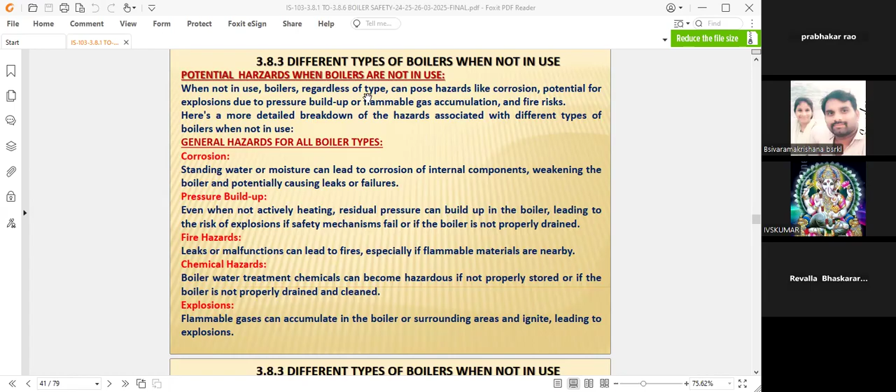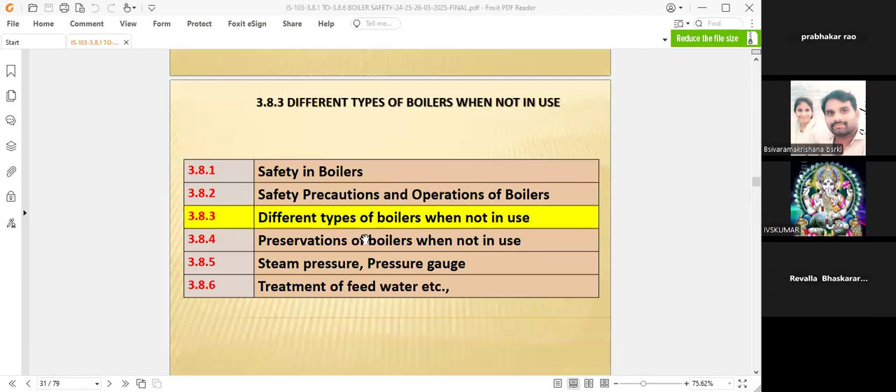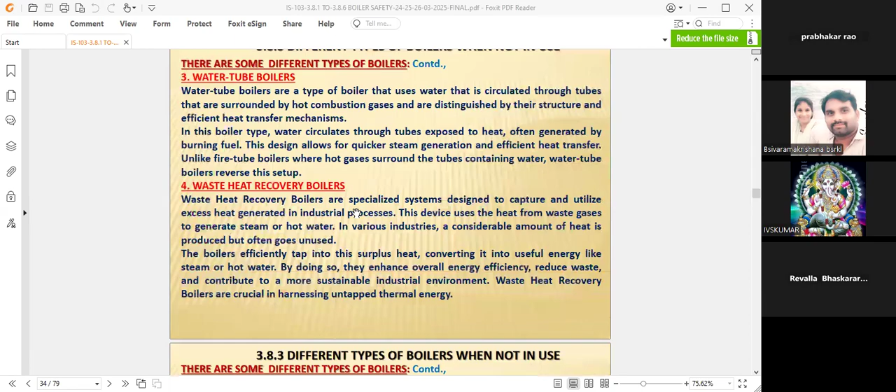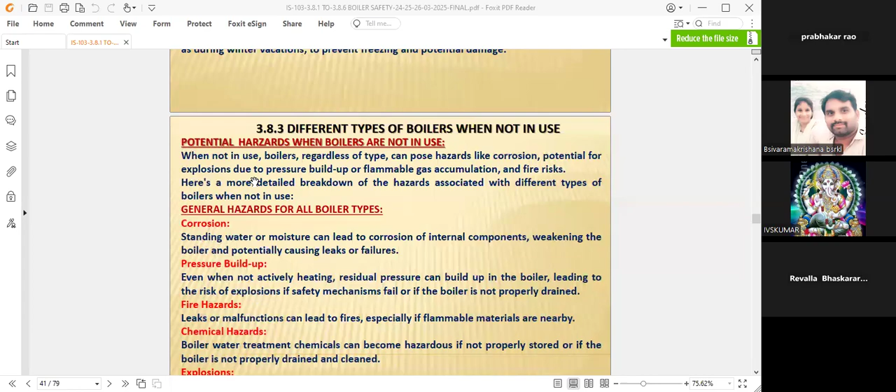Yesterday, we discussed the safety of different types of boilers. In that, we'll be discussing several things with different types of boilers. With respect to different types of boilers, what are the potential hazards? What are the potential hazards when the boilers are not in use? Then we will go to the safety precautions after the potential hazards associated with when the boilers are not in use.

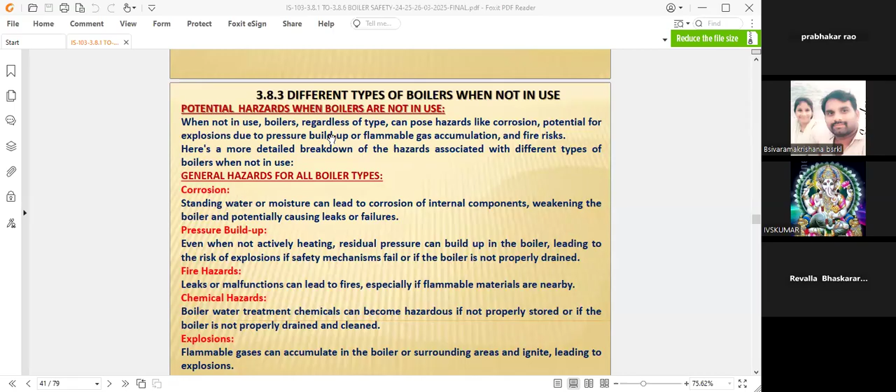When they are not in use, boilers, regardless of type, whatever type it may be, can pose hazards like corrosion, potential for explosions due to pressure buildup or flammable gas accumulation, and fire risks. Because of being not in use, they can have hazards like corrosion, because of standstill water, and potential for explosion due to pressure buildup inside the tubes because of accumulation of water. Flammable gas accumulation is also there, and fire risk may also be possible.

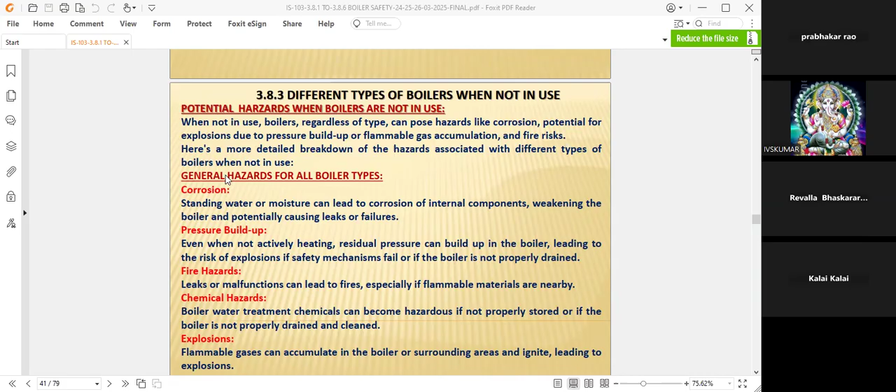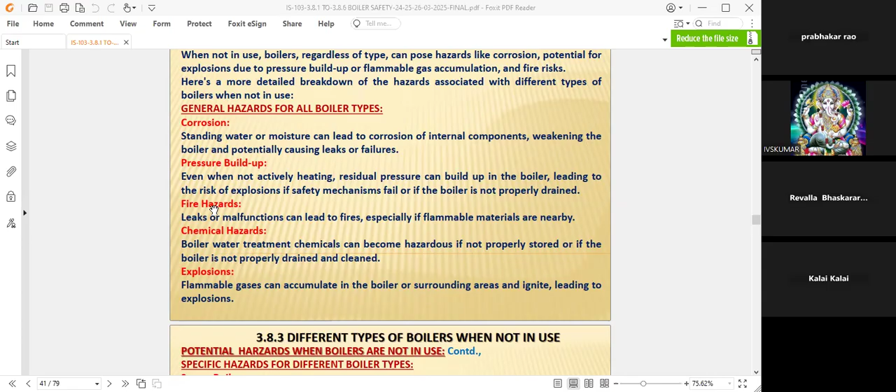Therefore, here is a more detailed breakdown of hazards associated with different types of boilers when not in use. One hazard is corrosion. Once corrosion has taken place, definitely pitting and leakage of the boiler will happen during running. It will explode. Pressure buildup is one of the hazards. Fire hazard is another hazard. The chemical hazard and the explosions.

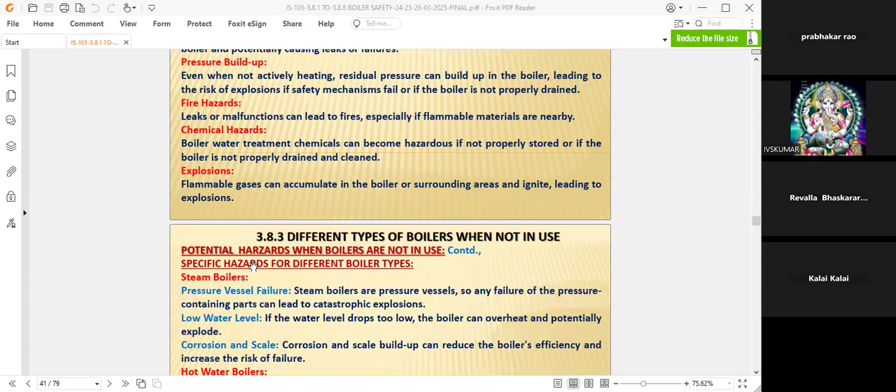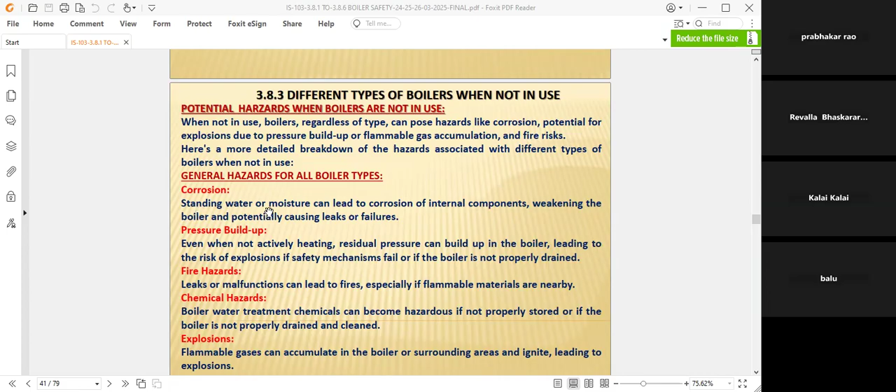Apart from this, there are specific hazards with respect to steam boilers, hot water boilers, condensing boilers, oil-fired boilers, and gas-fired boilers. There are specific hazards for these types of boilers also. But in general, for all types of boilers, corrosion is one of the hazards. Standing water or moisture can lead to corrosion of the internal components, weakening the boiler and potentially causing leaks or failures because of the corrosion.

Pressure buildup is also there. Even when not actively heating, residual pressure can build up in the boiler, leading to risk of explosions if safety mechanisms fail or the boiler is not properly drained. Because before taking it into preservation, we have to first drain the accumulated water after the shutdown has taken place. Then after fully draining all the tubes, only then fill it up with feed water, and then close it once the pressure reaches. At that time, the pressure buildup is also there because of stagnated water.

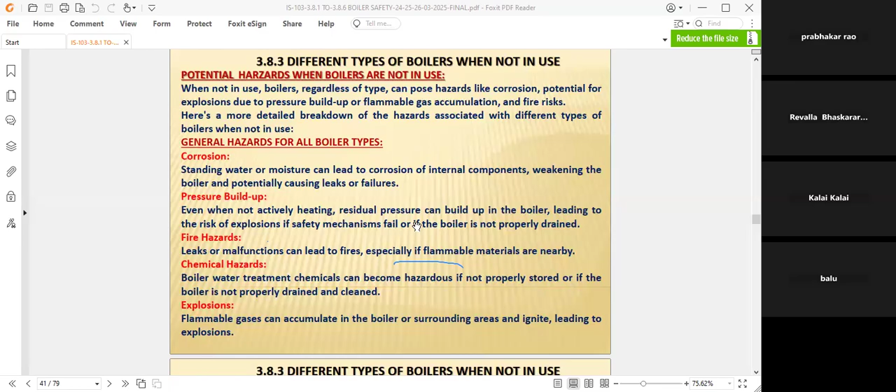Even when not actively heating, residual pressure can build up in the boiler, leading to risk of explosions if safety mechanisms fail or the boiler is not properly drained, because it depends upon being properly drained before being taken into preservation.

A fire hazard is also one of the hazards. Leaks or malfunctions can lead to fires, especially if flammable materials are nearby. Because once they preserve the boiler with all precautions, suppose in case anybody, unknowingly or knowingly, keeps flammable substances beside this boiler, it will lead to a fire hazard also. If the boiler leaks, or the flammable materials catch fire, then it will lead to the boiler also, and vice versa.

Chemical hazard is also one of the general hazards in the preservation of the boiler. Boiler water treatment chemicals can become hazardous if not properly stored, or if the boiler is not properly drained and cleaned, because it all depends upon how properly it is drained and washed with water before filling up again with feed water after the shutdown has taken place, before the preservation of the boiler.

So explosion is one of the important hazards. Flammable gases can accumulate in the boiler or surrounding areas and ignite, leading to explosions. We should not give any chance to explosion, by keeping visual inspection during the preservation of the boiler when not in use.

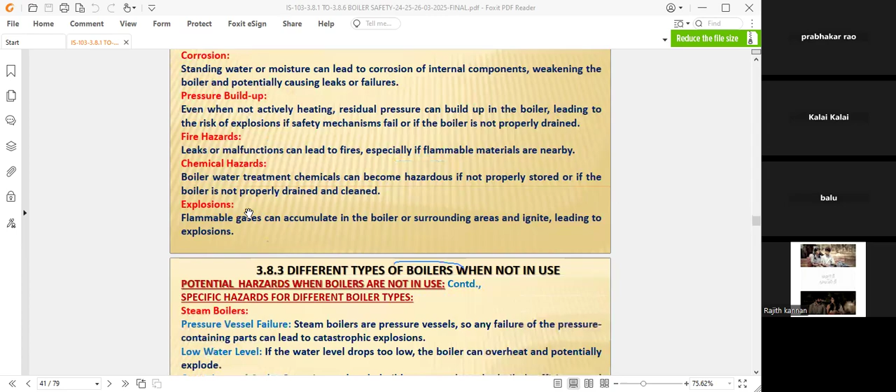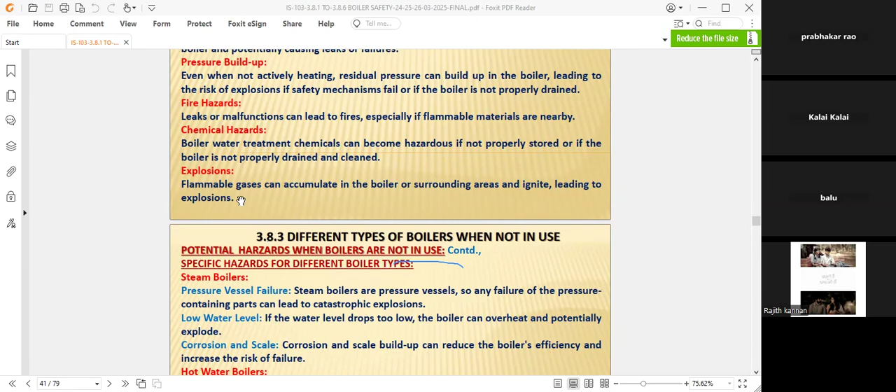Therefore, one boiler attendant and one helper are always there with the boiler, watching all the steam and pressure gauges. Though it is not heating, it is functioning, so we have to take care of the pressure gauges and temperature gauges, and the existing pressure you are keeping for the preservation. You have to see that it is definitely worthwhile by keeping supervision of this.

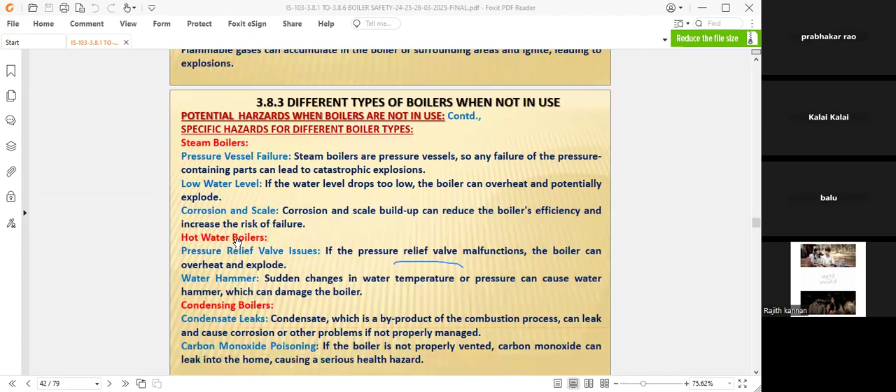Specific hazards with respect to individual boilers, apart from the general hazards, which I want to expose here. Steam boilers have some hazards. Hot water boilers have some specific hazards. Condensing boilers have some hazards, as well as oil-fired and gas-fired boilers.

For steam boilers, pressure vessel failure is a specific hazard. Another is low water level. High water level is also there, and corrosion and scale is also one of the specific hazards with respect to the steam boiler. Pressure vessel failure, because the steam boilers are pressure vessels.

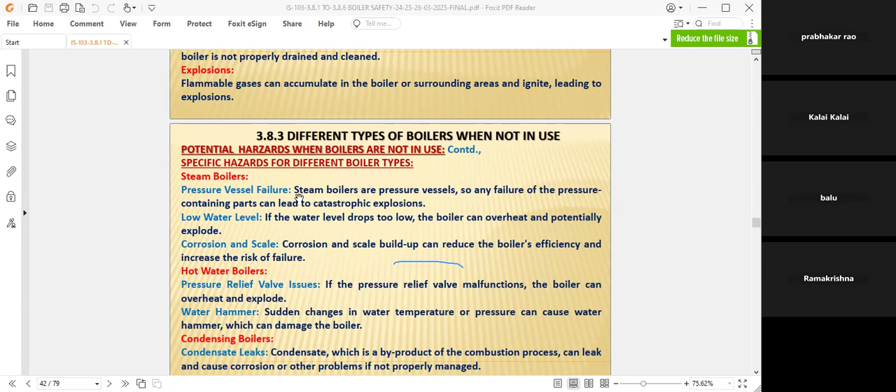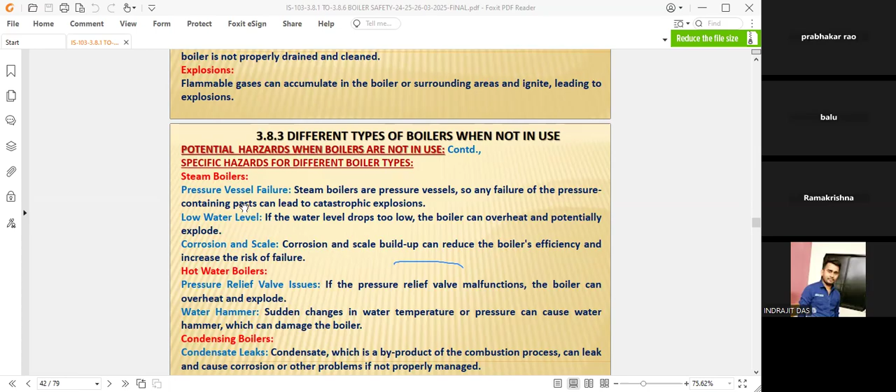So many failures of the pressure containing parts can lead to catastrophic, fatal explosions because of the steam pressure, temperature of the water, condensate pressure and temperature, flue gas pressure and temperature, blow down valves and blow down pressure, blow down water, and feed water pressure. Everything depends upon the pressure vessel's functioning.

For low water levels, if the water level drops too low, the boiler can overheat and potentially explode, because when it is running and low water is there, we have to increase the combustion of the fuel, but it is not in use now. At that time, water level is low. We have to see that water level doesn't drop too low, because the boiler can overheat.

We are not supposed to let the water level be too low or too high. It should be maintained in the steam drum as well as the mud drum. We have to keep 50% of both: 50% steam, 50% water, like this. 50% feed water going to the feed water of the boiler tubes.

This is very important. Corrosion and scale also depends on this. Inside the tubes, it depends upon the feed water only, but outside the tube, it depends upon how best you can keep the boiler preserved when it is not in use. The corrosion and scale buildup can reduce the boiler efficiency and increase the risk of failure. When efficiency comes down, the risk of failure increases because of the corrosion and scale formation.

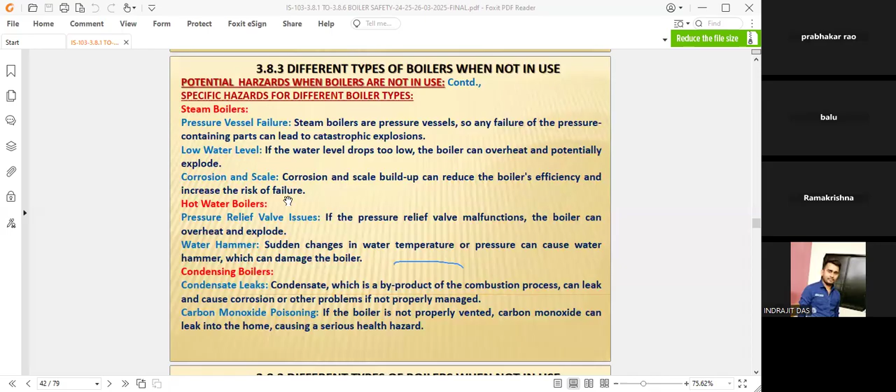Hot water boilers, since they are only for hot water generation, have issues with pressure relief valves and water hammer. We send the feed water, and by flue gas combustion and fuel consumption, flue gases are released. Due to the flue gas heat, the water inside the tube gets heated, and we get hot water.

During the process of getting hot water from feed water using the thermal condition of the flue gas, there may be valve leakages or clogs building up inside. Therefore, the pressure relief valve has to be taken care of. We have to immediately address the blow down, and any airlocks must be cleared immediately when the pressure relief valve is not working properly.

Therefore, pressure relief valve issues are more common in hot water boilers compared to steam boilers. If the pressure relief valves malfunction, the boiler can overheat or explode. If any malfunction is there, using the manual with the gauge glass, you have to check what level should be maintained and how much pressure should be maintained. This must be operated manually with the experience of the boiler attendant.

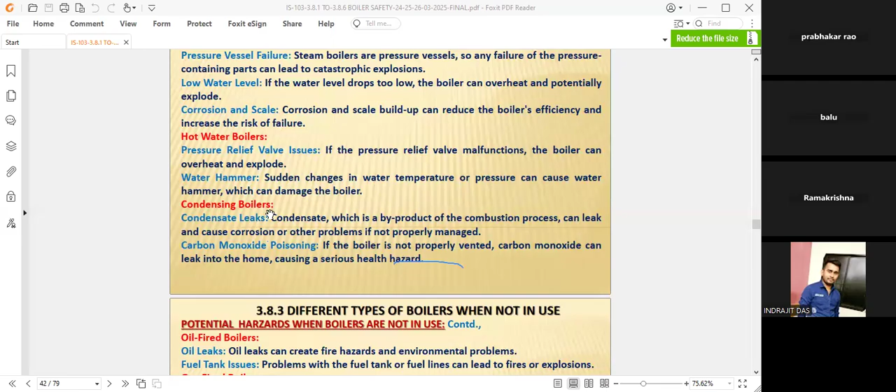Condensing boilers also produce condensate as vapors are consumed. The condensate leaks, and carbon monoxide is one of the poisonous gases involved. The condensate, a byproduct of the combustion process, can leak and cause corrosion or other problems if not properly managed, because along with the hot water or steam, the vapors need to be condensed.

The condensate reaches a temperature of about 90 degrees centigrade. You have to maintain both the temperature and pressure of the condensate. If the condensate, having that much temperature and pressure, develops leaks, the combustion will definitely be affected.

This creates an imbalance in flue gas generation, since combustion takes primary air, secondary air, and tertiary air through the FD fan. Combustion will differ, and the flue gas temperature and water temperature will all become imbalanced. That's why the condensate is one of the important areas to be managed carefully without any leakages.

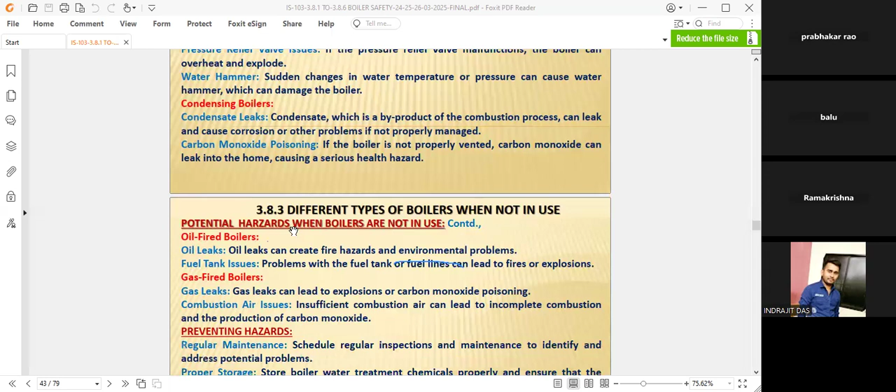For oil-fired boilers, oil leakage is there. Suppose fuel tank issues arise—oil leakage can create fire hazards and environmental problems. Fuel tank issues are also there; problems with the fuel tank or fuel lines can lead to fires or explosions.

The heating element should work properly through the pipes, because oil heating elements are very important to maintain the temperature of the oil, and the fuel tank also needs its temperature taken care of. Oil leaks create explosion and fire hazard problems. Fuel tank issues are also there—fuel tank meaning service tank, overhead tank, or the main tank.

Gas-fired boilers have gas leaks and combustion air issues, because gas leaks can lead to explosions or carbon monoxide poisoning. This happens when ducting is not properly closed, or manholes or furnace openings are not properly closed, so outside air or inside flue gases escape.

Due to the ID fan and FD fan, flue gas goes outside while outside air is injected inside, causing a lot of differences in the flue gases. Therefore, gas leaks should be avoided when supervising the preservation of the boilers and related systems.

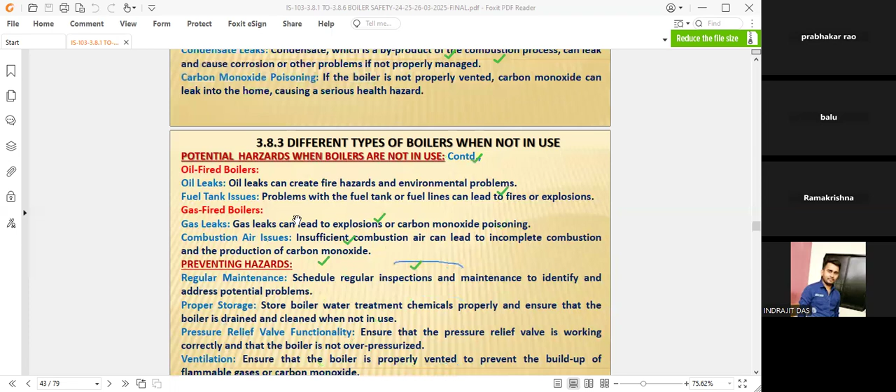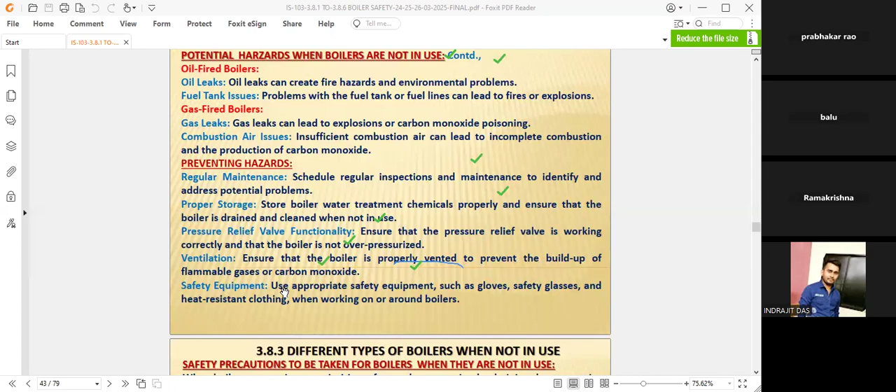Preventing hazards is also important. All hazards can be prevented by taking care of regular maintenance, proper storage, ensuring pressure relief valves function properly, proper ventilation, and proper safety equipment. By taking these five steps, potential hazards can be saved or minimized, mitigating the consequences that can happen.

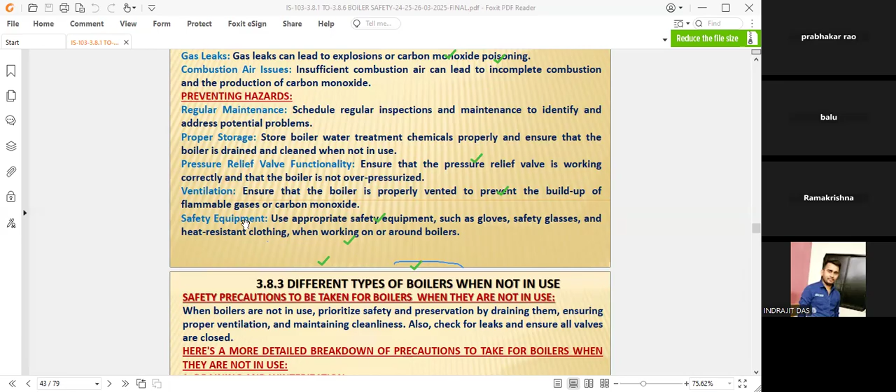I think who is the gentleman putting this green mark here, sir? Please kindly control this, sir. I'm requesting whoever is doing this by mistake, please don't mark like this. The other participants are getting confused about why this tick mark is being done. Please don't tick mark like blue and green, please.

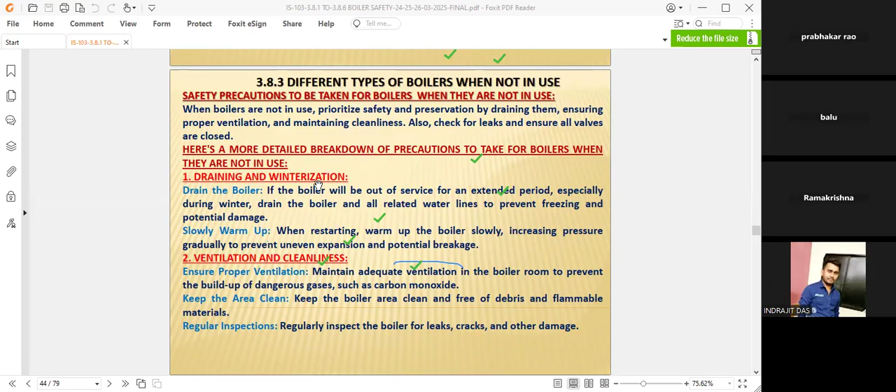So after potential hazards, we have to take care of safety precautions. Draining and winterization is important. Ventilation and cleanliness. And the third one is shutting down, restarting, and maintenance is important.

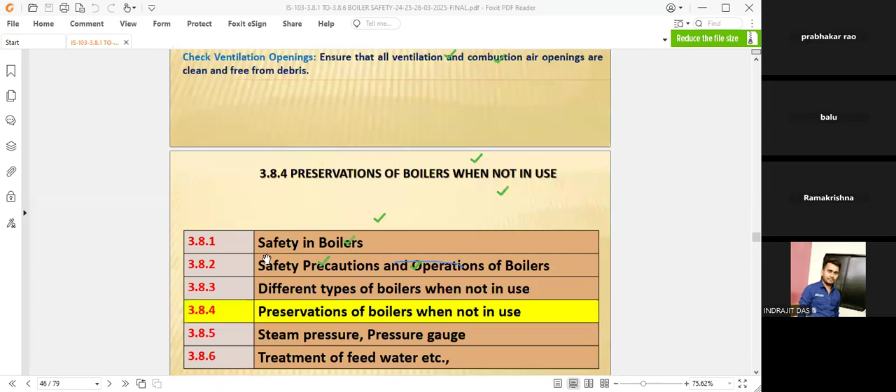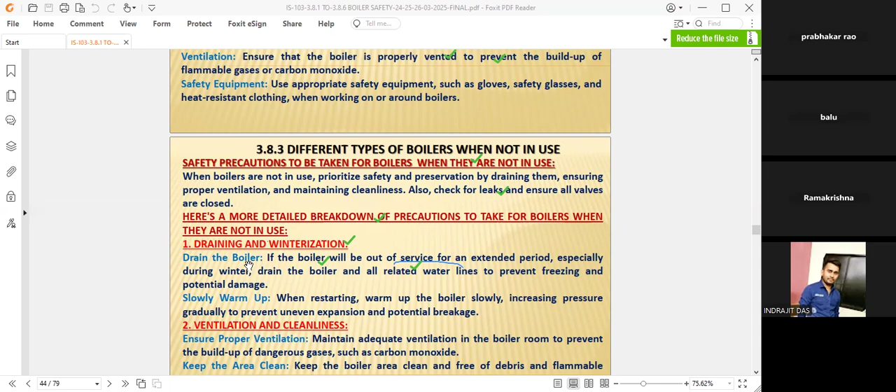When compared to different types of boilers, these things must be taken care of: draining and winterization, because draining the boiler is very important, and slowly warming is also very important. The boiler may be out of service for an extended period, especially during winter, so drain the boiler and all related water lines to prevent freezing and potential damage, since all the tubes are empty after draining.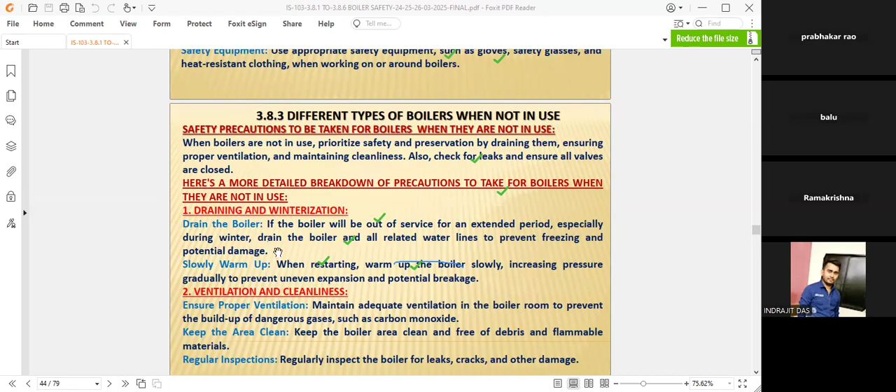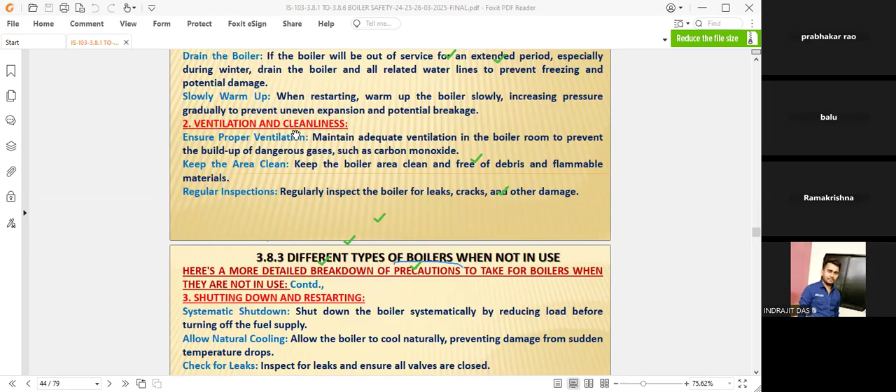It should be ensured that there is no water accumulation in any of the furnace tubes, boiler tubes, or economizer tubes. While running, it should be slowly warmed up, not suddenly heated, because as already discussed, tube failures will occur due to differences in water temperature.

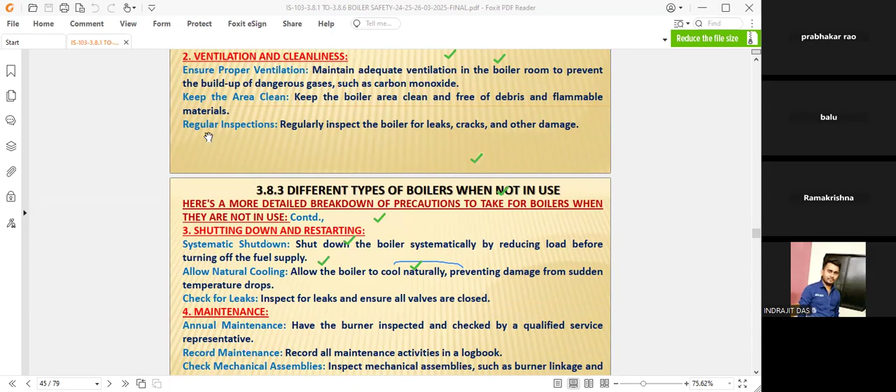Ventilation and cleanliness are also important. Ensure proper ventilation, keep the area clean, and conduct regular inspections.

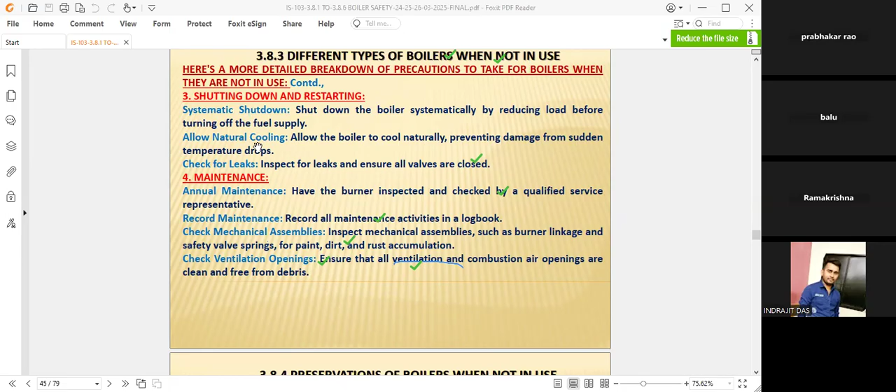Shutting down and restarting is important: systematic shutdown following a sequential manner, allow natural cooling, and check for leakage. After shutdown, give some time for natural cooling, then try to start once maintenance is over, checking for leakage before starting as well.

Maintenance also includes annual maintenance, record maintenance, checking mechanical assemblies, and checking ventilation openings. A very important word here is predictive maintenance.

That means where preventive action is not present in the systems, a risk-based approach is needed for all boilers. That's why we have to carry out risk assessment, and predictive maintenance will also be planned.

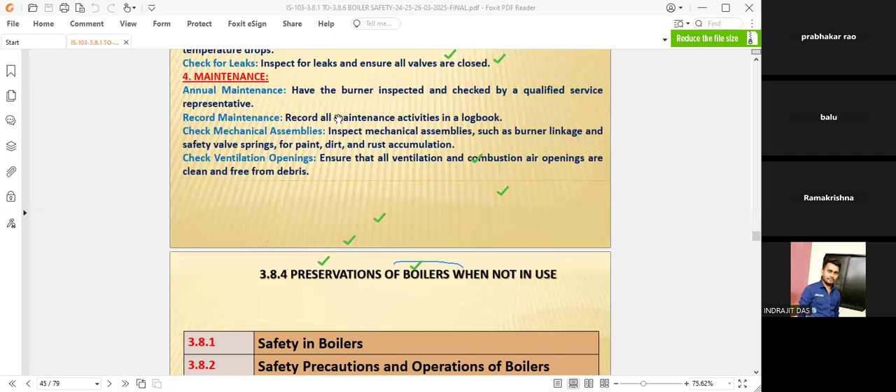Because the preventive maintenance we are planning, breakdown maintenance is sudden and unplanned, shutdown is planned, but in between we have predictive maintenance. That means whenever the occasion or opportunity comes, when the boiler pressure is getting down because steam is not required in other sections or by the turbine, at that time we slow down the steam pressure as well as the boiler pressure and the fuel feeding to the furnace or boiler. At that time, we have to take up preventive maintenance where the possibility is there.

And the last one is preservation of the boilers, which is very important.

The preservation of the boilers, please don't tick mark, sir. I request all the participants, anyone who is doing this green tick mark, please don't do this, sir. Kindly requesting. Please kindly wipe it out if anybody has done it unfortunately or unknowingly. Please. Thank you very much, sir.

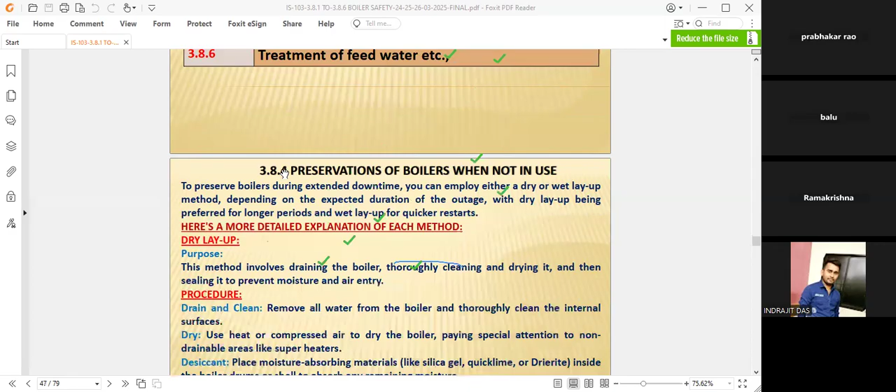The preservation of the boilers when not in use is very important. This is the third step. Preserve the boilers during extended downtime. That means we keep it at zero pressure, we are not extracting the steam or hot water, but extended downtime will be there. You can employ either a dry or wet layup method. There are two methods, dry layup and wet layup, depending upon the expected duration of the outage, with dry layup being preferred for longer periods and wet layup for quicker restarts.

See very clearly, dry layup is used when a long extended time is taken for the boiler, days together or hours together. But if you want to start immediately, go for the wet layup procedure. If a long downtime is there, go to the dry layup procedure. What is dry layup and what is wet layup we'll also be discussing. The purpose of this method, dry layup, with longer extended downtime, is the preservation of the boiler.

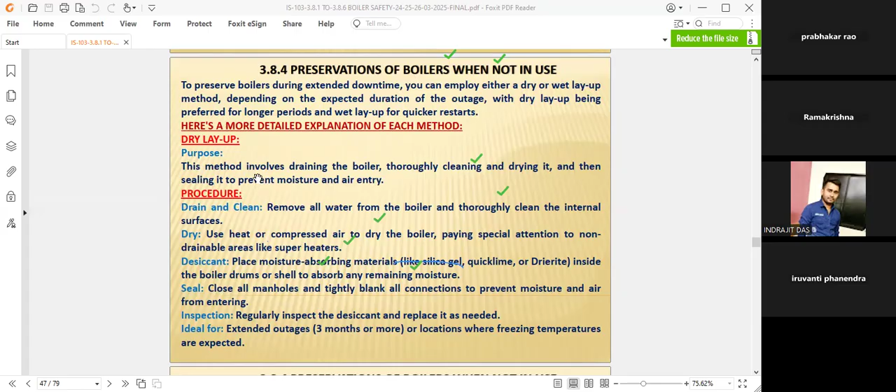This method involves draining the boiler thoroughly, cleaning and drying it, and then sealing it to prevent moisture and air entry. Because once a long time is there, after stopping the firing and slowly cooling down, drain all the accumulated water through all the sections like furnace, boilers, economizers, and clean thoroughly. Cleaning means normal water will be sent to clean any accumulations on the inside surface of the tubes. After the cleaning, drying it, natural drying is also taken care of.

Then if you ensure that there is no moisture inside or outside the tube, you have to take care of sealing it to prevent moisture and air entry again. This is called dry layup. The procedure is drain and clean: remove all water from the boiler and thoroughly clean the internal surfaces, number one. Then dry it, natural drying. Use heat or compressed air to dry the boiler after natural cooling, because heat is already there. That's why we are not supposed to apply heating immediately.

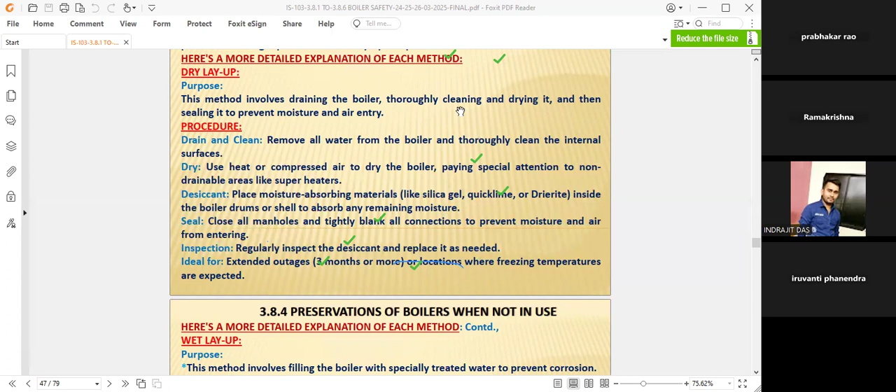Who is the gentleman, sir? Ramakrishna Garu, please advise one of your participants not to mark like this, sir. Because if any beginners are there, it will be misleading why Prabhakar sir is tick marking with green. Even after saying, people are still doing it. Very unfortunate situation. I'm sorry if I'm causing you any inconvenience. Please don't do such things. Ramakrishna Garu, please convey. Why is the mark put, sir? This green mark, sir. Green right marks are there in my presentations. Somebody putting marks there means it will come as green marks. I am not putting them, sir. I am not saying that. No, sir, Ramakrishna Garu, I am requesting you to convey to your colleagues. I am also conveying. Because you are the senior most person, that's why I am requesting, sir. Okay, sir. Thank you, sir.

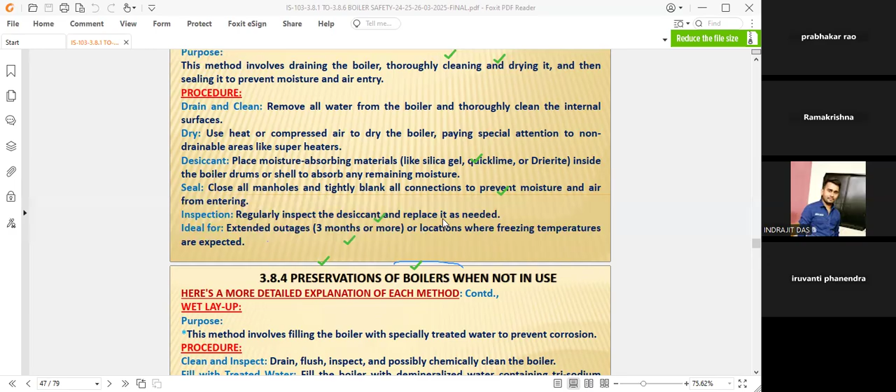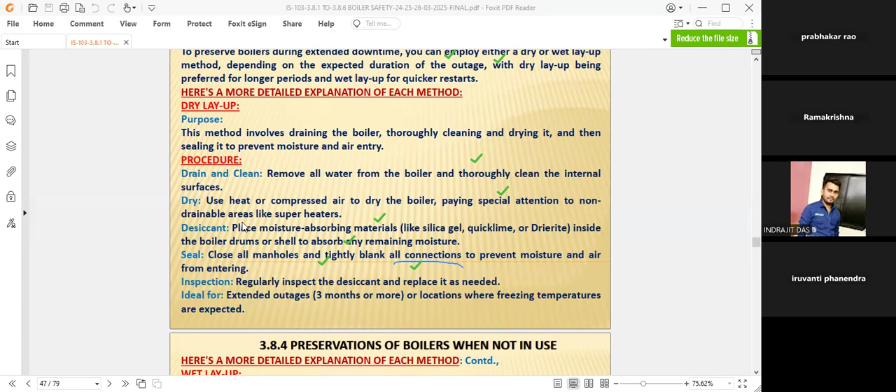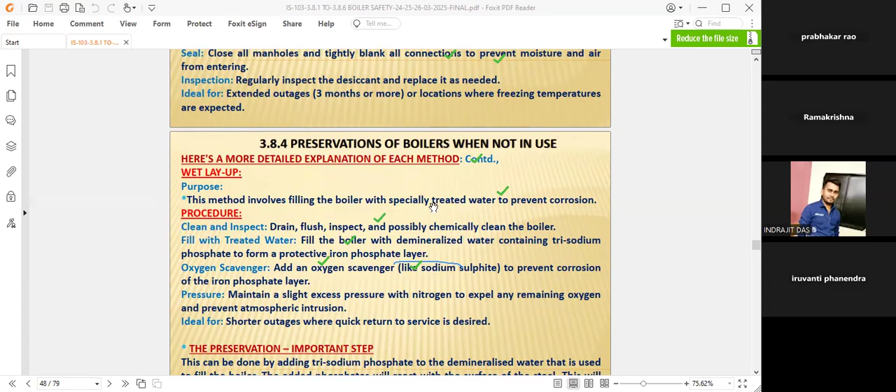Another important thing: dry layup is for an extended period, 3 months or more. Go for the dry layup procedure. If 3 months or less time is there, go for wet layup. This method involves filling the boiler with specially treated water to prevent corrosion. I will mark this because under this there is an important point. Filling with specifically treated water to prevent corrosion means some materials, like for removing moisture, silica gel, quicklime, and the like.

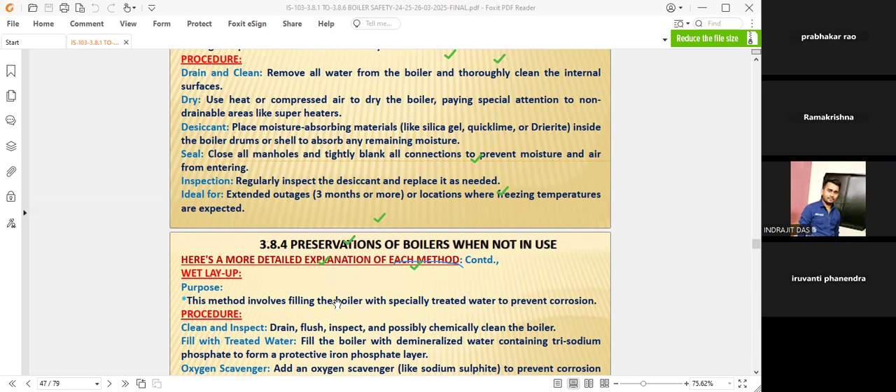In this wet layup also, we have to use some chemicals, which we will tell in the coming slide. That procedure is there where less time is available, taking only 1 day or 3 days or 4 days. You can go for the wet layup procedure because otherwise we can waste resources like fuel and all these things. This method involves filling the boiler with chemically treated feed water to prevent corrosion.

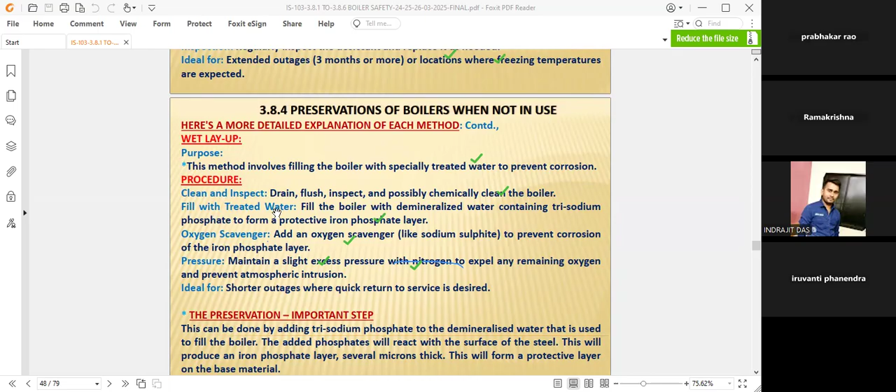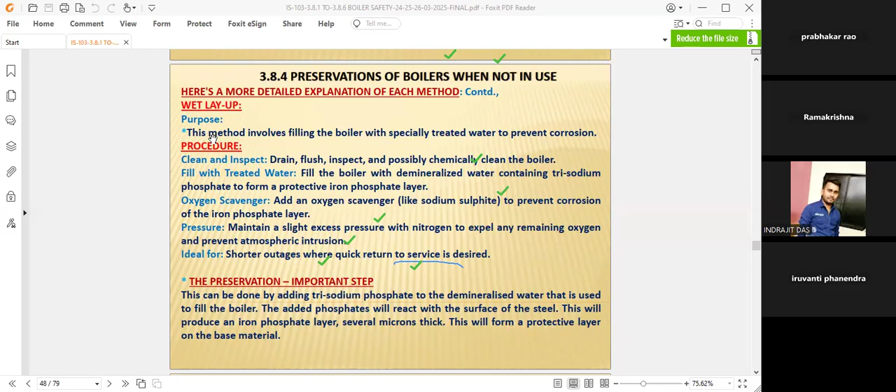Wet layup: clean and inspect, drain, flush, inspect, possibly chemically clean the boiler, fill with treated water. Fill the boiler with demineralized water, that means DM water, containing trisodium phosphate to form a protective iron phosphate layer, as will be explained. An oxygen scavenger like sodium sulfite is also added to prevent corrosion of the iron phosphate layer. Because once you send the demineralized water with trisodium phosphate, it protects the iron phosphate layer.